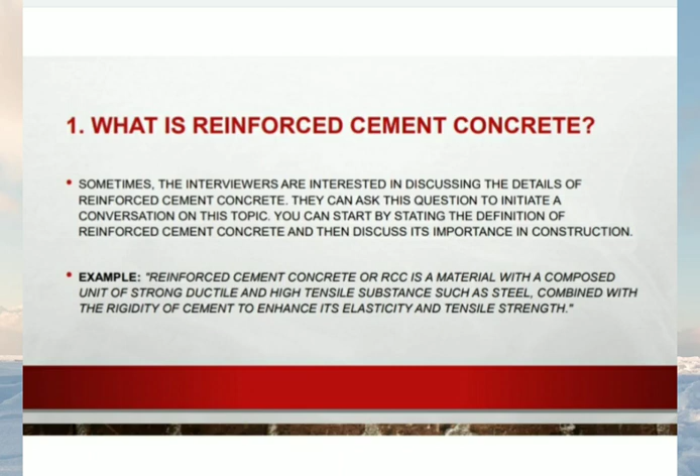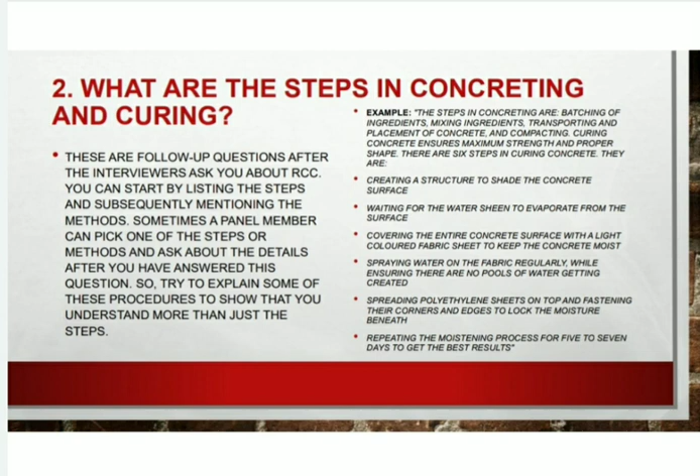Curing concrete ensures maximum strength and proper shape. There are 6 steps in curing concrete. They are creating a structure to shade the concrete surface, waiting for the water sheen to evaporate from the surface, covering the entire concrete surface with a light-colored fabric sheet to keep the concrete moist, spraying water on the fabric regularly while ensuring there are no pools of water getting created, spreading polyethylene sheets on top and fastening their corners and edges to lock the moisture beneath, and repeating the moistening process for 5 to 7 days to get the best results.

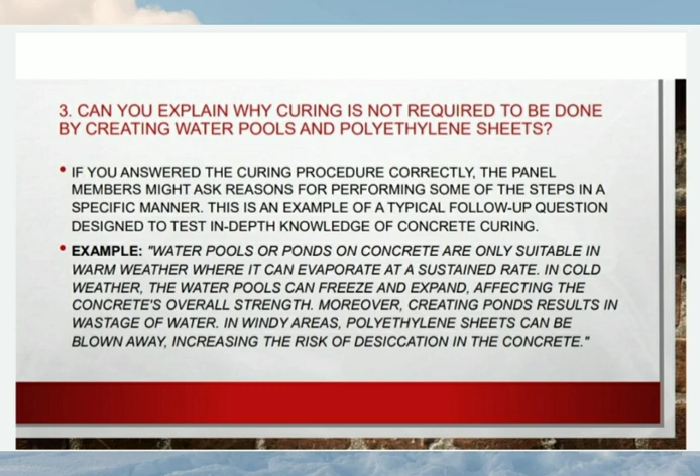3. Can you explain why curing is not required to be done by creating water pools and polyethylene sheets? If you answered the curing procedure correctly, the panel members might ask reasons for performing some of the steps in a specific manner. This is an example of a typical follow-up question designed to test in-depth knowledge of concrete curing. Example: water pools or ponds on concrete are only suitable in warm weather where it can evaporate at a sustained rate. In cold weather, the water pools can freeze and expand, affecting the concrete's overall strength. Moreover, creating ponds results in wastage of water. In windy areas, polyethylene sheets can be blown away, increasing the risk of desiccation in the concrete.

4. What is the nominal concrete proportion for different grades? Some hiring managers often ask this question to check if your fundamentals are strong. It is useful to list the ratios and specify the units to make a better impression. Example: the grade-wise concrete proportion is M10 = 1:3:4, M15 = 1:2:4, M20 = 1:1.5:3, M25 = 1:1:2, M30 = 1:1:1, where Mn is the grade, n is the compressive strength measured in N/mm², and the ratio represents the proportion of cement with fine aggregate and coarse aggregate.

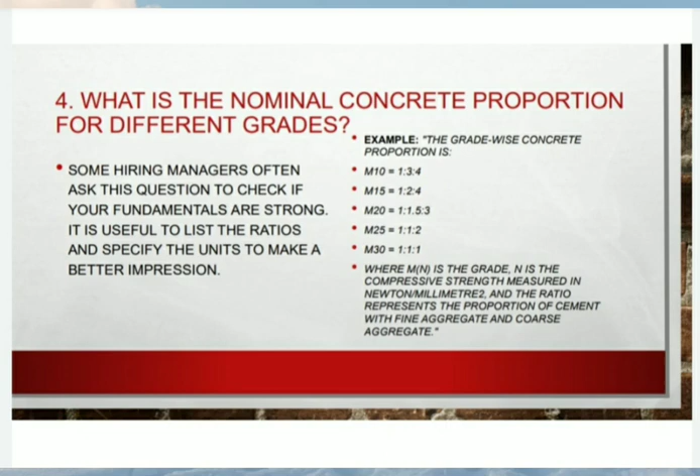5. What are the concrete tests? Interviewers ask this question to see if you are aware of industry standard quality checks on concrete. Try to list the critical tests and provide reasons. If you know all the tests, you can mention them afterward. Example: the 2 primary concrete tests are compression test and slump test because cement quality is often determined based on its compression and ratio of water and cement. Permeability and rapid chloride ion penetration tests ensure the minimum required density of concrete to avoid rust formation on the steel reinforcement and subsequent cracking and spalling of concrete.

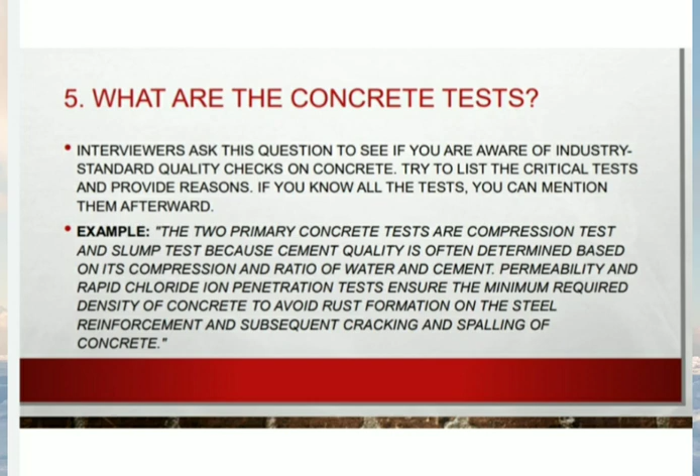6. What are the different types of slumps in a slump test? This question is to check if you know detailed information about a slump test and its results. Mention all three types and give a reasonable explanation about each. Example.

The three different types of slumps are true slump, shear slump, and collapse slump. True slump marks a uniform decrease in mass of concrete in all directions without any signs of disintegration, retaining the overall shape. Shear slump shows that a concrete mixture does not have any cohesion, which results in the shearing of the top portion and a sideways breakdown.

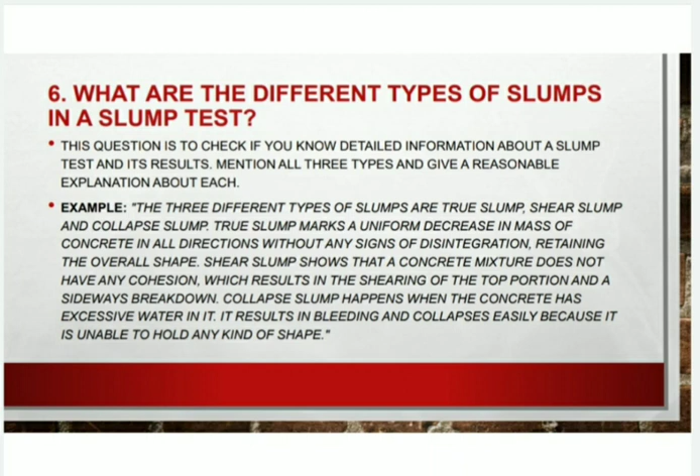Collapse slump happens when the concrete has excessive water in it. It results in bleeding and collapses easily because it is unable to hold any kind of shape. 7. What is bleeding in concrete? Sometimes, the interviewer may ask this follow-up question if you answered the previous question correctly. This question tests if you know the terminology or if you have just memorized the answers. Example. Bleeding is a process in which excess portion of unabsorbed water segregates to the surface in cement hydration.

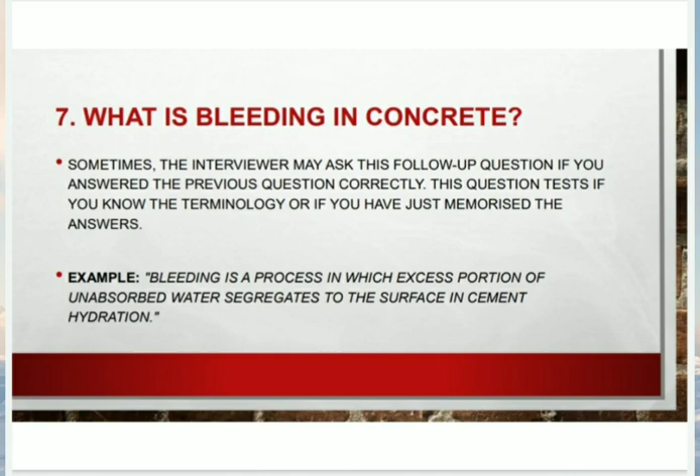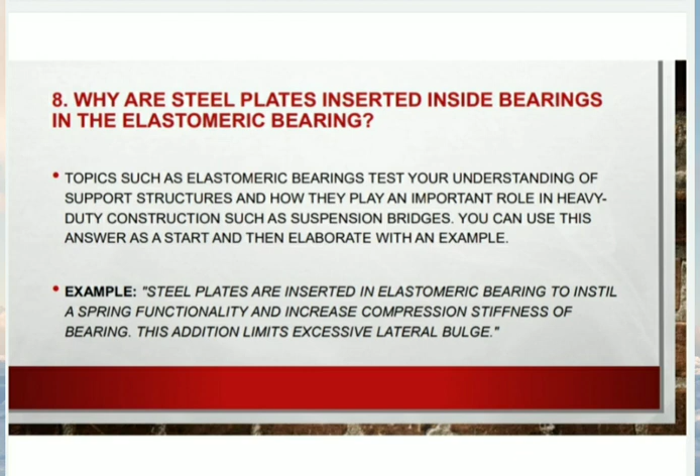8. Why are steel plates inserted inside bearings in the elastomeric bearing? Topics such as elastomeric bearings test your understanding of support structures and how they play an important role in heavy-duty construction such as suspension bridges. You can use this answer as a start and then elaborate with an example. Example. Steel plates are inserted in elastomeric bearing to instill a spring functionality and increase compression stiffness of bearing. This addition limits excessive lateral bulge.

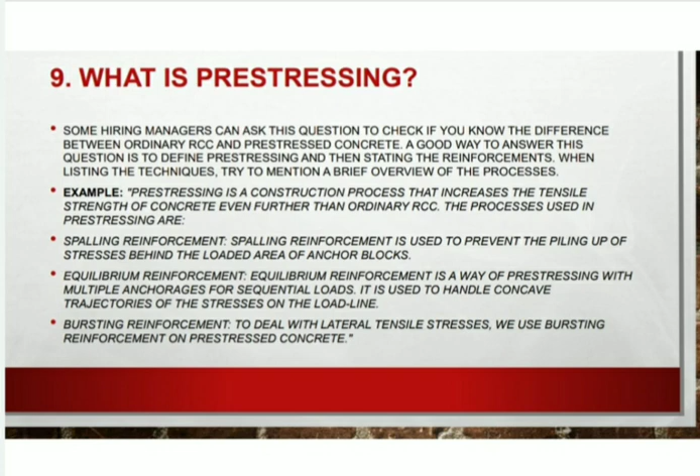The processes used in pre-stressing are spalling reinforcement. Spalling reinforcement is used to prevent the piling up of stresses behind the loaded area of anchor blocks. Equilibrium reinforcement. Equilibrium reinforcement is a way of pre-stressing with multiple anchorages for sequential loads. It is used to handle concave trajectories of the stresses on the load line. Bursting reinforcement. To deal with lateral tensile stresses, we use bursting reinforcement on pre-stressed concrete.

10. Explain pre-tensioning and post-tensioning. Sometimes, the interviewer wants to know if your knowledge of pre-stressing is extensive enough. You can answer this question by mentioning how these methods relate to pre-stressing and then state the differences between them. Example. Pre-tensioning and post-tensioning are two different methods used in pre-stressing. The core concept involves using tensioned wires or bars of steel as reinforcement structures in cured concrete.

In the pre-tensioning method, the wires or bars are anchored to a metal support. Then we use hydraulic jacks to induce tension and fix side molds. Concrete is then poured around the tensed structure to harden and accommodate the compressive force from the jacks. The post-tensioning method is similar in concept as far as the placement of cables in concrete is concerned. But, tension is applied to the wires or cables after the concrete is hardened. This method works best for cases where modular concrete units are required to be connected to create a larger member on site.

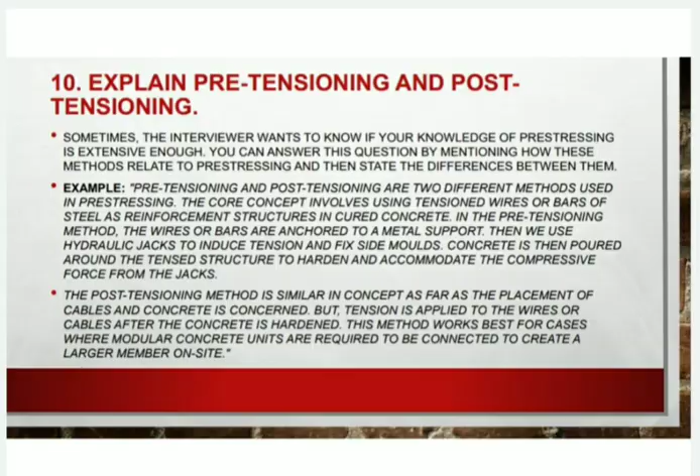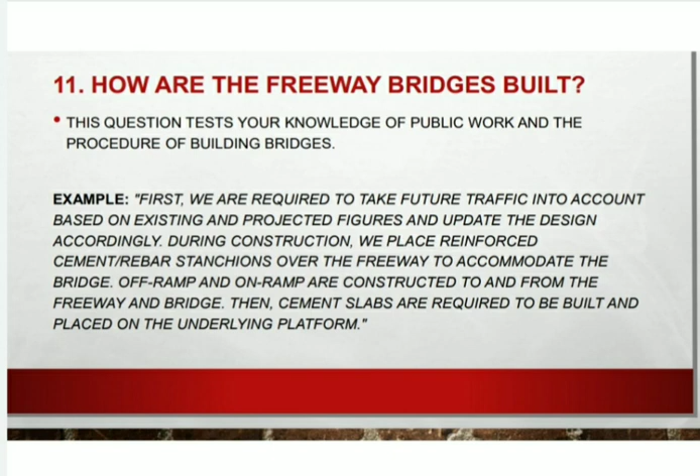11. How are the freeway bridges built? This question tests your knowledge of public work and the procedure of building bridges. Example. First, we are required to take future traffic into account based on existing and projected figures and update the design accordingly. During construction, we place reinforced cement rebar stanchions over the freeway to accommodate the bridge. Off-ramp and on-ramp are constructed to and from the freeway and bridge. Then, cement slabs are required to be built and placed on the underlying platform.

12. State any incident when you had to face a critical situation. The employer wants to know whether you have decision-making and problem-solving skills. You can narrate any incident when you solved the problem successfully to answer this question. Example. I dealt with a problem on the site of a bungalow construction. While we were constructing an upper slab, I heard a slight cracking noise. I checked the supporting structure immediately and found that it was shaking under the weight of a worker who was standing on top of it. I cautioned him to stop working immediately, get down and reinforce the wooden supports, preventing a major accident.

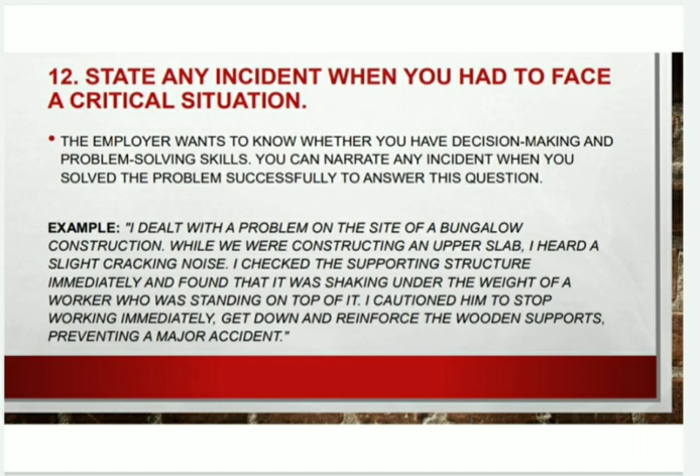13. What are the ethics of civil engineering according to you? The answer to this question shows your priorities and work ethic. You can talk about environmental and public health issues if they ask you to elaborate. Example: I believe that a civil engineering job involves giving better infrastructure and shelter to people, keeping environmental issues and public health in mind. All the very best for your bright future.